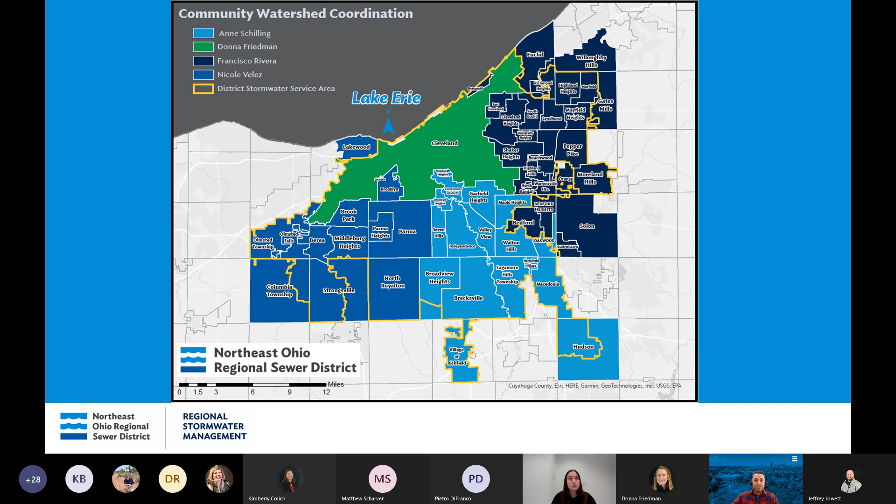So to talk about the community cost share program, as you know, 25% of the total annual stormwater management program fees collected from each member community are allocated to your community cost share account. You can use these on local stormwater projects. Currently there's over $21 million available to our member communities for your local projects.

A few things to keep in mind. You need an approved application and executed agreement before a project begins, so make sure to submit your application, get it approved, and get that agreement executed. Also consider an allocation agreement for larger projects to allow for reimbursement over the next 5 years, this way you don't have to have all the money in your account up front. And when your projects are complete, remember to submit for reimbursement. The funds are there for you, they're encumbered and ready for you to receive back through reimbursement, so please submit your reimbursements and continue to use your community cost share funds.

I also wanted to share with you this highlight, since the program started, how much money has been reimbursed in total annually. As you can see, over $39 million has been reimbursed for stormwater projects in the local communities. This program has been very effective, and we'd like to continue to see that happening in the region.

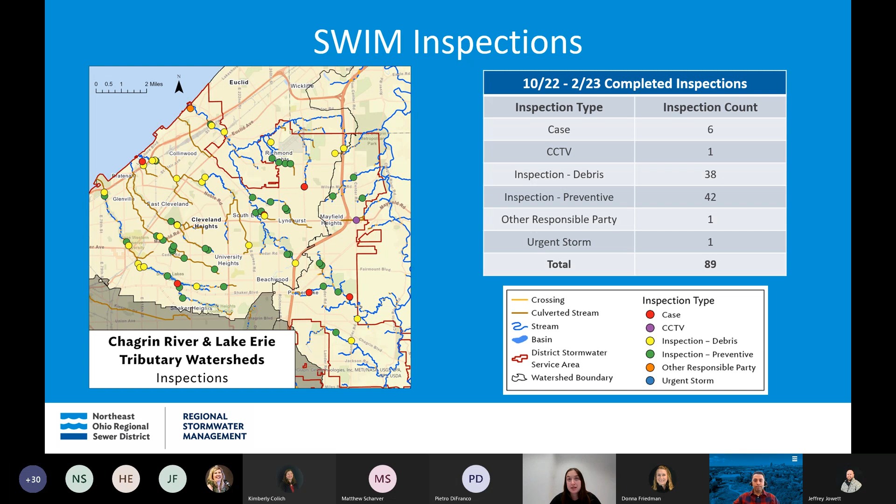So our maintenance department, since we last met, has completed 17 debris and sediment removal projects in the Chagrin and Lake Erie tributary watersheds. Those debris and sediment removal projects totaled approximately 399 cubic yards of debris and 150 cubic yards of sediment removed.

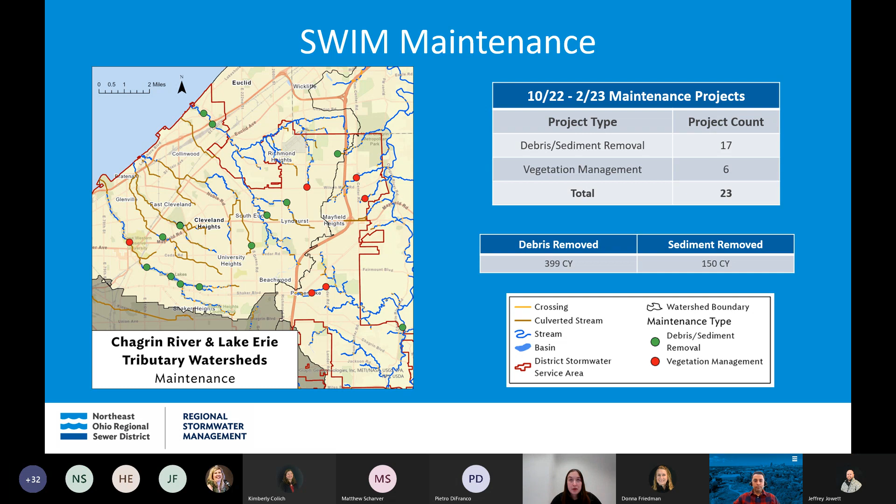We have also completed 6 vegetation management maintenance projects, which are performed by our internal maintenance crew, and they're primarily performed at regional project sites, and they include activities such as weed and invasive species management, tree pruning, planting live stakes, etc. Next slide, please.

This year, we are beginning the design of debris racks at the inlets of 2 culverted stream sections of 9 Mile Creek along Belvoir Road in Cleveland and Cleveland Heights.

At this particular location, the culvert is about 12 by 12 feet, there's a middle wall that splits the culvert into 2 pipes. So it's a hot spot for debris in the culvert to accumulate at this location, which is where this manhole is located.

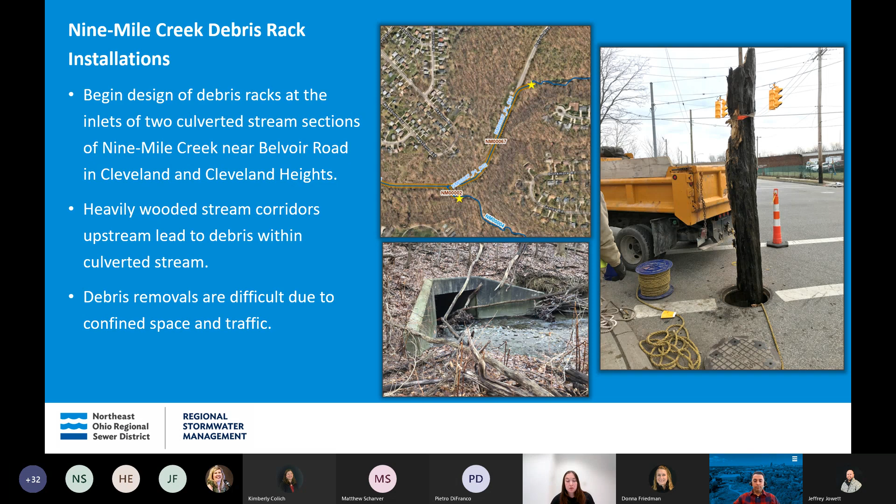We have previously removed approximately 130 cubic yards of large woody debris from this culvert. So installing these debris racks and access roads at the inlets will significantly improve our inspection and maintenance processes for access and debris removal. Next slide, please.

This year, we began construction in January 2023 of our Doan Brook Stream Bank Stabilization at the Shaker Heights Country Club. The asset was identified as a top contributor of sediment to Green Lake during a SWIM 2021 root cause failure analysis study. Performing this project, we determined would help prevent sediment transport to the Green Lake forebay, which would reduce our dredging maintenance efforts in the future.

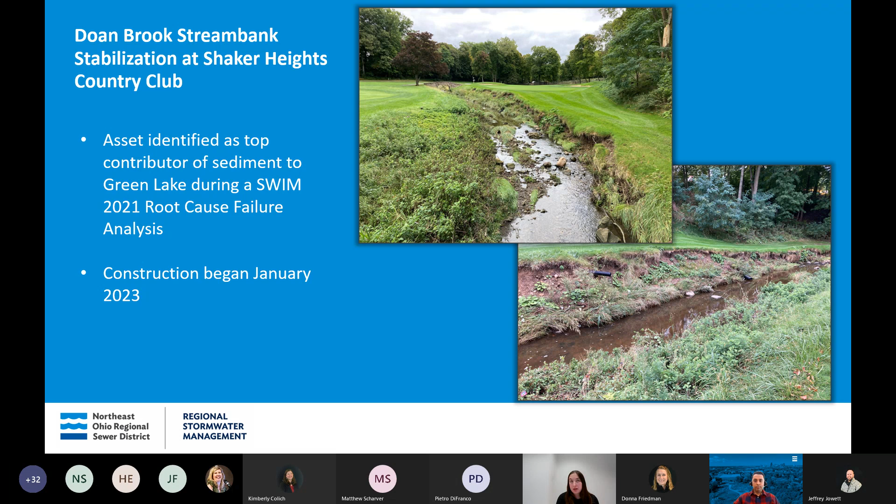Next slide, please. And so this photo was taken about a week ago. This is prior to the planting of a native riparian mix along the soil bank area that you can see above the rock protection. That will be completed by the substantial completion date of April 30th, 2023.

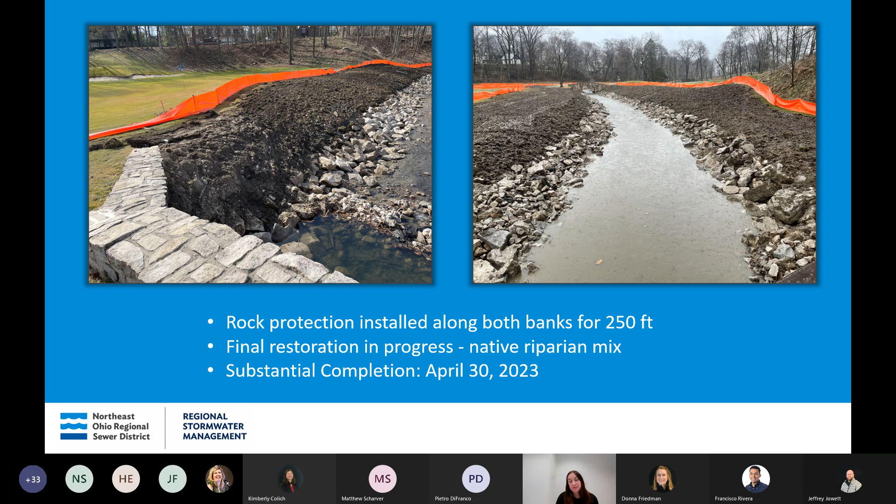And next we have Mike Blair, who is the project manager in our Watershed Technical Support Group. Thanks, Andriana, and good afternoon, everyone. If we have the next slide, please.

Just to give you a quick summary regarding the Chagrin River and Lake Erie Direct Tribs Stormwater Master Plan. The study itself was completed in May of last year. And since that time, we've distributed all the community reports to each of the communities located within the Chagrin River and Lake Erie Direct Tribs watersheds.

So you should have a chance to take a look at those and review them and let us know if you have any questions. Since that time, in the last fall, I'll be talking about this shortly, we have taken all the problem areas identified during this study and have put them through our nomination process. We've scored each of the problem areas and have prioritized them and started to incorporate them as part of our annual stormwater construction plan review.

What I'd again like to reiterate to everybody here is that please take a look at these community reports and the plan, the overall report themselves, and let us know. Reach out to your watershed team leader to let them know if you have any questions, if you'd like us to review the problem areas with you, to get any updates that you might have, and any questions you might have about implementing the alternatives that are identified in the master plan.

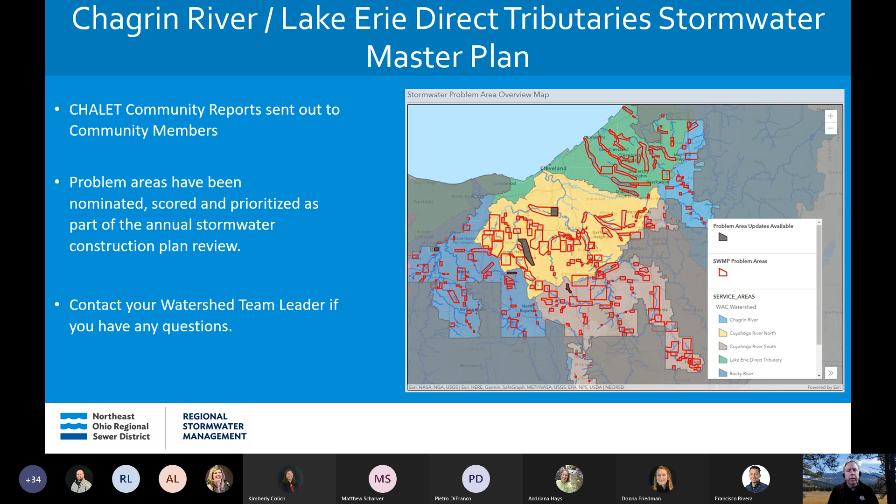As mentioned in the previous slide, we took both the problem areas identified in the latest stormwater master plan study along with all other nominated projects through the nomination process to arrive at our 2023 stormwater construction plan. We ran all nominations through August 2022, validated them from August through October, and reviewed previous nominations for updates. We then scored and prioritized them, completing that process in November. We're now finalizing the 2023 plan, which we hope to have approved by our board later this month.

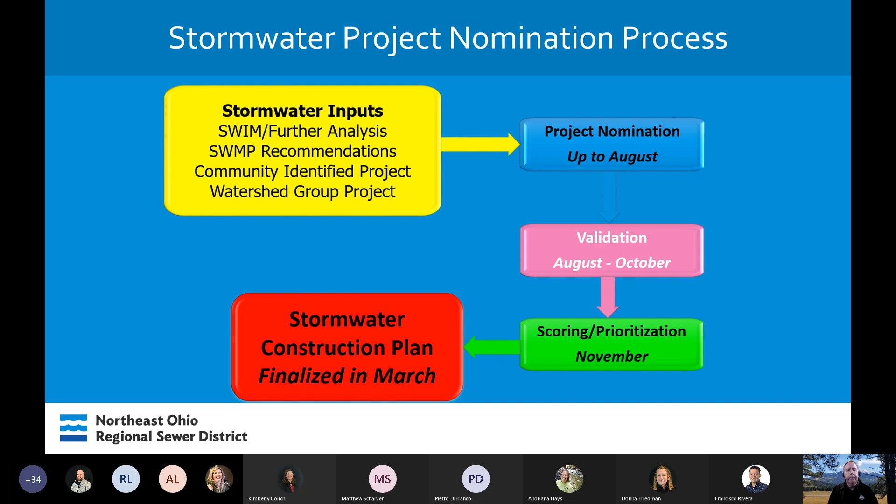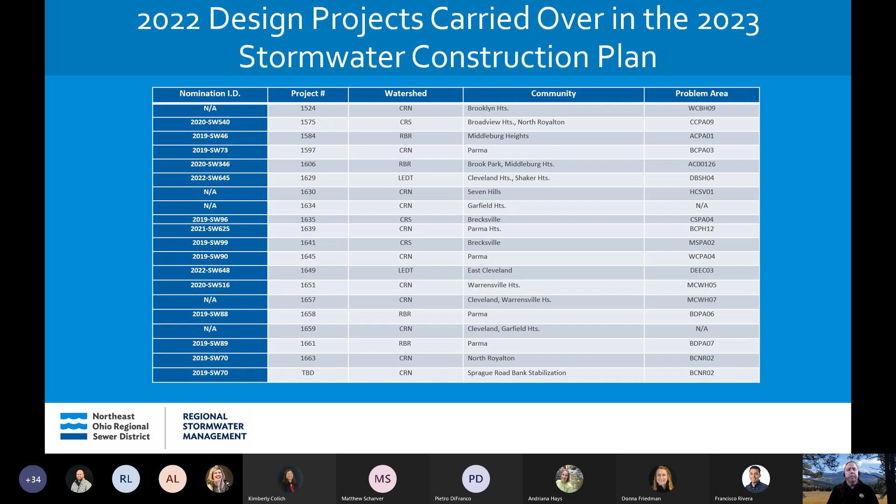In addition, we're adding 4 new projects that are immediately ready for our design phase. The first is the Phase A Kolleda Ditch. We have a lot of failing infrastructure there, so we're moving that ahead through pre-design.

The next project is located in the Rocky River watershed, West Branch Problem Area 5, in Olmsted Township. We've secured a critical mass of the property needed to move forward with phase 1, so we've put it on the list for this year.

The next one is the Applewood Basin improvements, also in the Rocky River watershed. We have a large amount of failing infrastructure associated with those basins, so we thought it prudent to move that into design to maintain conveyance through the area.

Finally, the Smith Road Basin project, in the Rocky River watershed on Abrams Creek. We've secured all the property associated with this alternative and received federal funding for design and construction. Based on the timing of that funding, we needed to move it forward for the 2023 construction plan. This isn't the only list of new projects coming on board - as we gain further capacity, both financially and with design and labor, we'll be moving additional projects through this year.

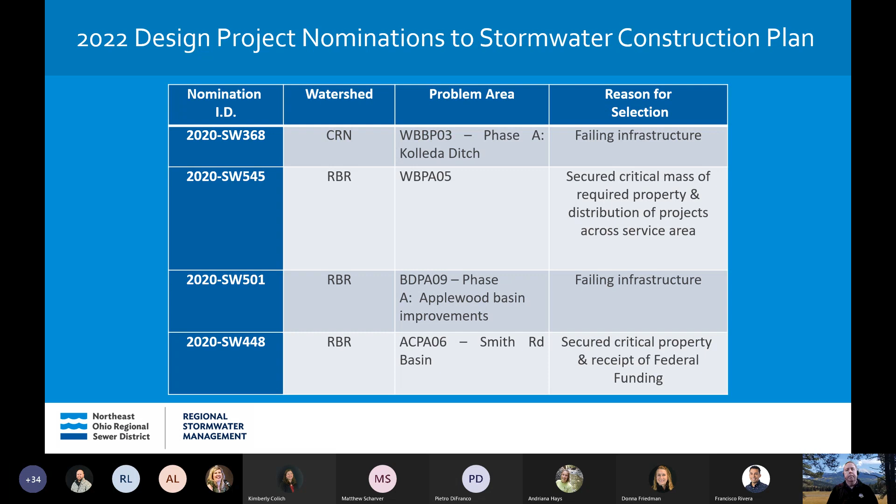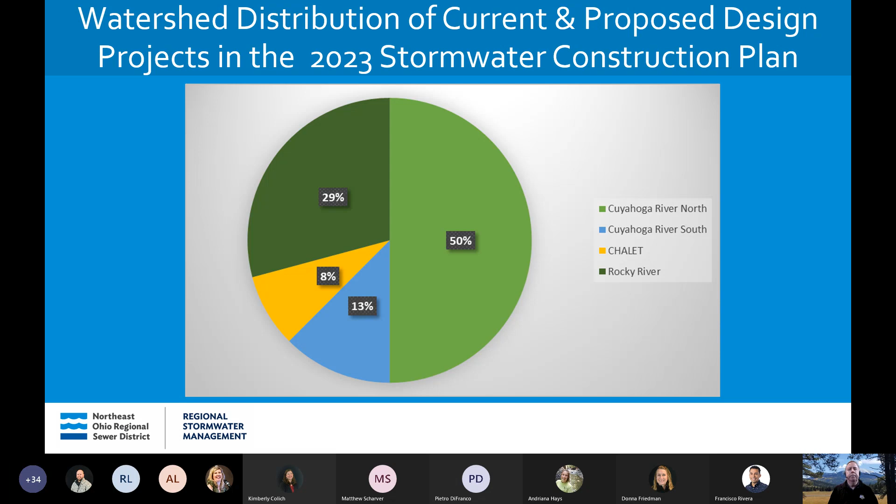Now, as I mentioned, we have about a dozen projects that make up our top 25 stormwater nominations that we're actually recommending to go through our advanced stormwater planning process. And the reason why we want to move these projects into this phase is that these are projects that, when...

...we were doing the planning study, really require additional information to fully understand the RSS impacts going on with these problem areas. So this may require additional coordination with community members affected by this problem area, doing some further detailed analysis of our swim models that cover the problem areas, and actually maybe even gathering some further field verification information.

The second way that this might go into advanced planning is based on the cost that was put together during the master plan study, where we basically get projects that are essentially $10 million or more, that's a significant impact on our annual budget, and it puts a big strain on that.

So that's where we want to take a look at these again, see if we can break these down into phases, which are more easily able to go through our workflow on an annual basis. Another reason we would want to do phases is if we're looking at a particularly complex alternative, where these could be potentially problem areas that might be a mile long, involving culverts, open stream segments, and crossings. What we're trying to do is break that up into more manageable projects that we can put out for bid and implement for construction.

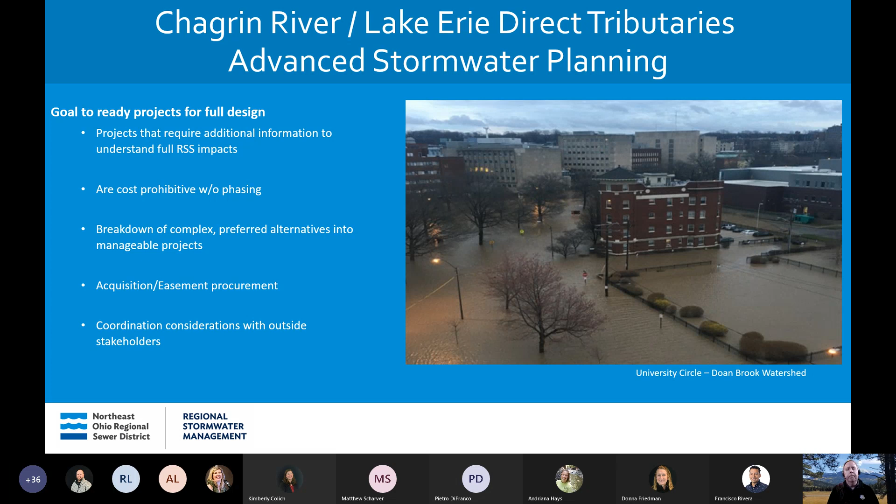And then we're going to be looking at a neighborhood, the Milligan, Erwin, and Carrington Avenue neighborhood, just east of West 130th Street. Again, this has been ongoing, looking at the alternatives, tweaking them where we need to in order to get that advanced planning done in the third quarter of 2023.

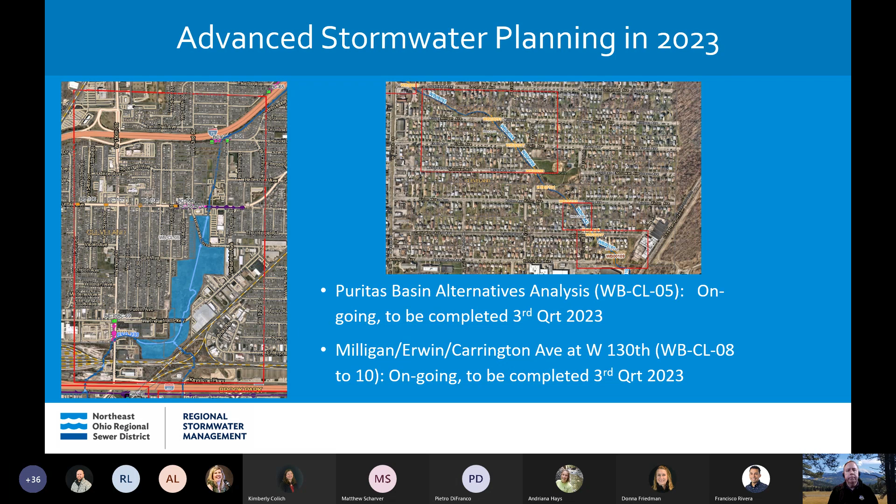And following the completion of those two, we're going to be starting up a third advanced planning task. Again, this involves the Big Creek West Branch, basically 3 problem areas that were identified in that area. In this case, the preferred alternatives that were developed for those 3 problem areas are no longer viable.

So what we want to do is get a better understanding of the interactions between the regional stormwater system and the adjacent local stormwater system through our modeling, and get a better understanding of what the benefits are to the RSS and the LSS by implementing the new alternatives that are identified during this planning process.

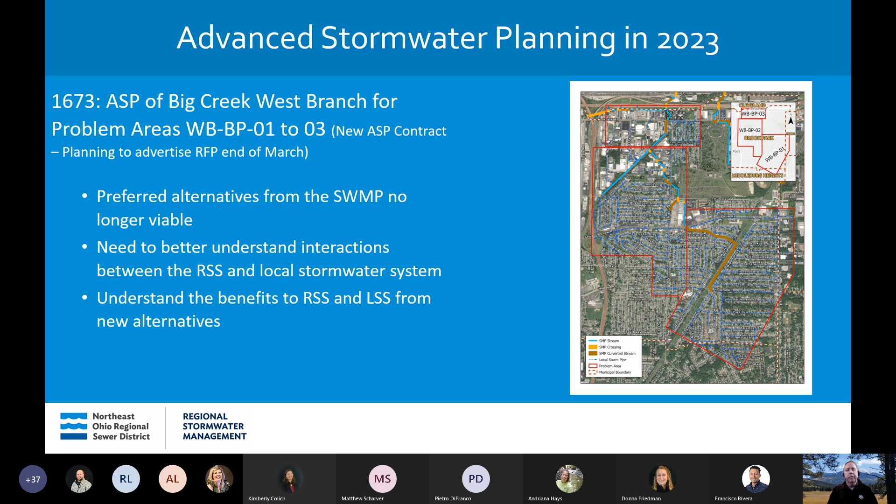We have 3 projects that are getting ready to start or are currently in the construction phase, and we've just recently completed, in December of 2022, the Foster's Brook stream restoration over in Mayfield Village. Our community lead on that one was the Cleveland Metro Parks.

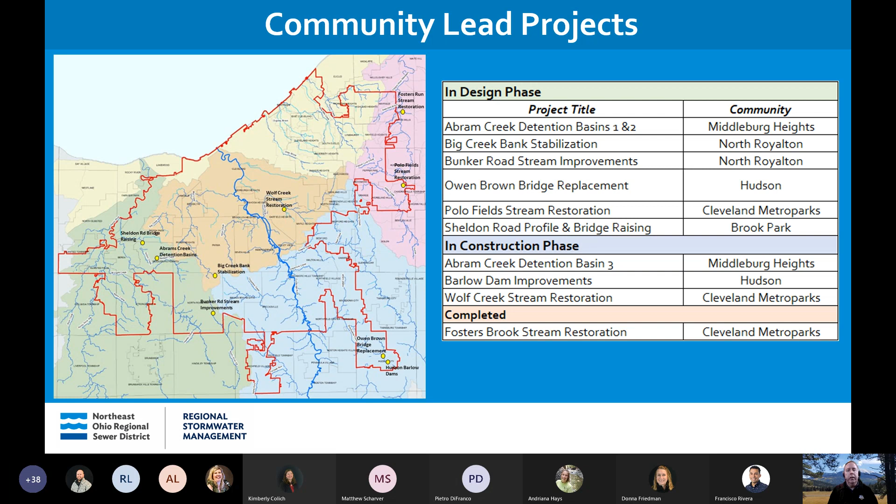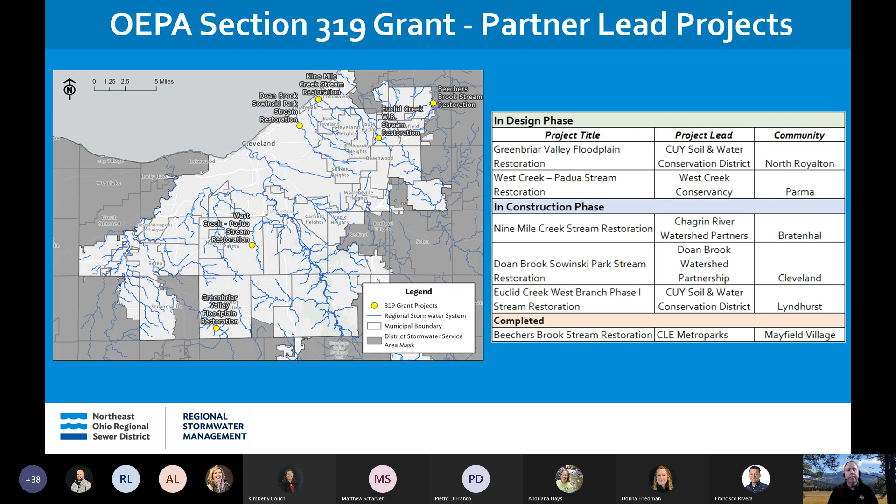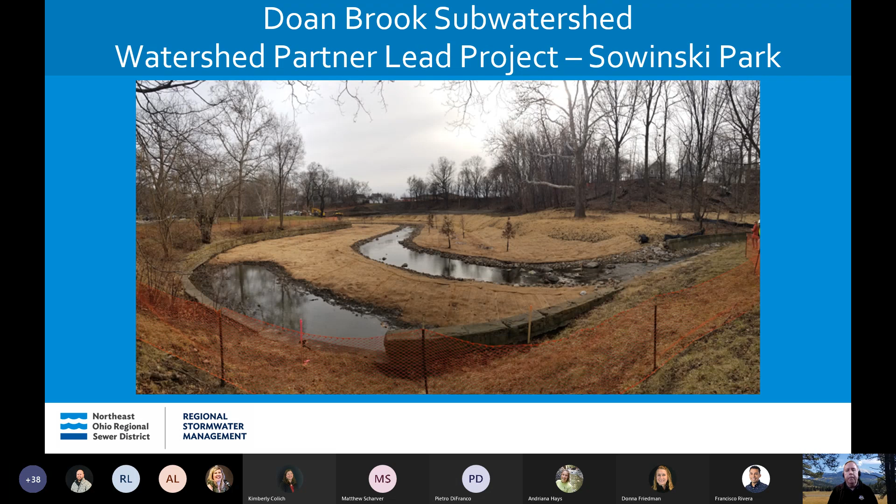As of today, this is what the project site looks like. They've reached substantial completion at the end of February this year. You can see a more sinuous main channel of Doan Brook with an expanded floodplain and stabilized banks. We were able to cut down some of those concrete blocks in certain areas to open up that channel and floodplain. In the lower left-hand corner, you can see where we repurposed the old stream channel to make a small wetland area, which will be further enhanced with additional plantings occurring later this spring.

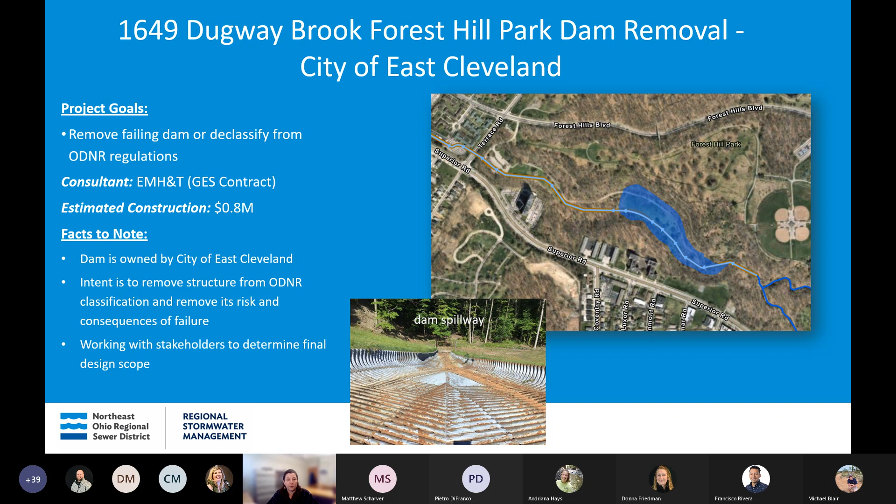The next project is the Doan Brook restoration near Horseshoe Lake Park. We have a few slides on this, and I'll go through a summary of where we're currently at and where we're headed. This project is to remove the Horseshoe Lake Dam, which is failing, and restore the two stream corridors that were impounded by this dam, one on the north side and one on the south side, that formed the horseshoe shape of the previous lake.

We're going to be integrating stream restoration with some landscape architecture. Our consultant is a joint venture between AECOM and Stimson. We are currently under pre-design. We've done extensive public outreach and public forums, both communicating where we're at and gaining information back from the public on things they want to see in this park after we're done. It looks like June we'll be wrapping up our pre-design, and after that we'll move into detailed design, hopefully with our AECOM Stimson team.

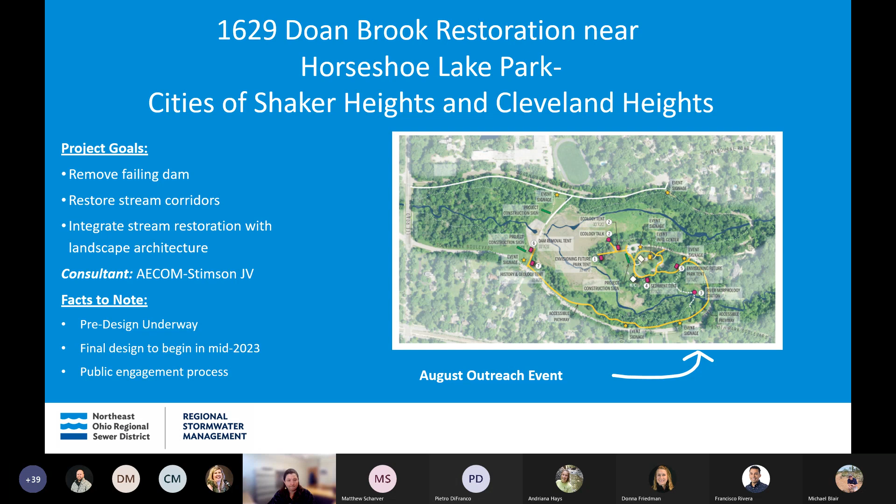After that event, our designers went and started working on different alignments for the streams. There's two streams that come together, so one question was where should these streams now confluence? Is it at the existing dam location, or further downstream? Where does the stream want to be, and where can we put it so the park has space for landscaping or public amenities that communities might want?

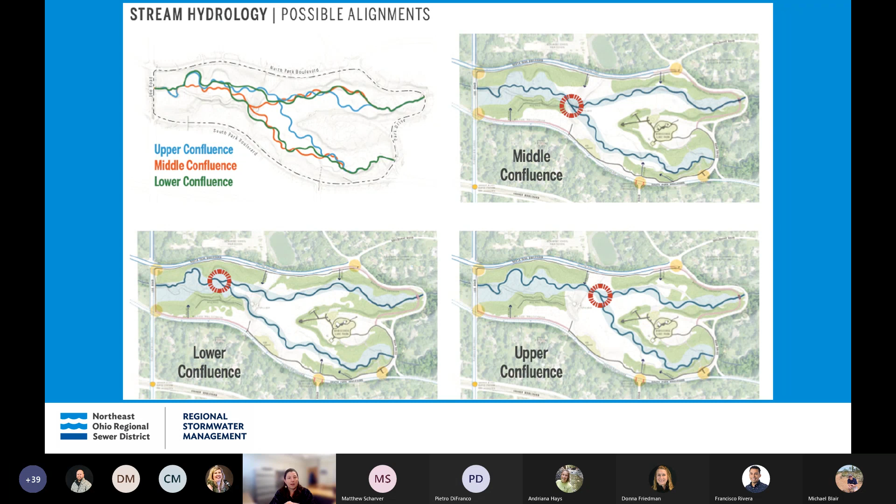So what we did was take three different possible alignments and came back together with the public in December. We had three different alignments, and we had park amenities cut out that people could place on the maps to give us an idea of what type of park they would like and what landscape architectural features they were interested in seeing.

Some of the items they could place included paths to cross the stream, bird lookout locations, more traditional park features, a sledding hill, or something as large as an amphitheater, each with different costs. We challenged participants to look at all the potential amenities within a certain budget, knowing we can't put everything out there and have to prioritize.

The real question we need to get through is what do we do with that sediment? Can we use it to create landscaping mounds within the park area? Are there locations to put the sediment that might give it some landscape creativity or innovation within the park space?

Okay, one project to highlight during the construction section, next slide. We're actively constructing this Pepperloose Creek project in Pepper Pike on Gates Mills Boulevard.

This is a project where we purchased one home in order to reroute a failing culvert, and we also had the opportunity to provide more storage within the boulevard of Gates Mills Boulevard to hold back more water, because this was a location where during large rain events, the water was overtopping the road in excess of our measured 9 inches.

We always use this 9-inch rule where we consider that impassable. So this project not only provided storage and replaced an existing culvert that was failing, but we also tied into the downstream open channel segment.

So that's currently under construction. It started last year. I believe our completion should be this summer, maybe third quarter this year. So we'll have that completed.

One thing to note on this project was that the city of Pepper Pike utilized some community cost share for rehabbing one of the upstream culverts within the project area that was within the right of way. So this one's rolling and hopefully to be complete soon.

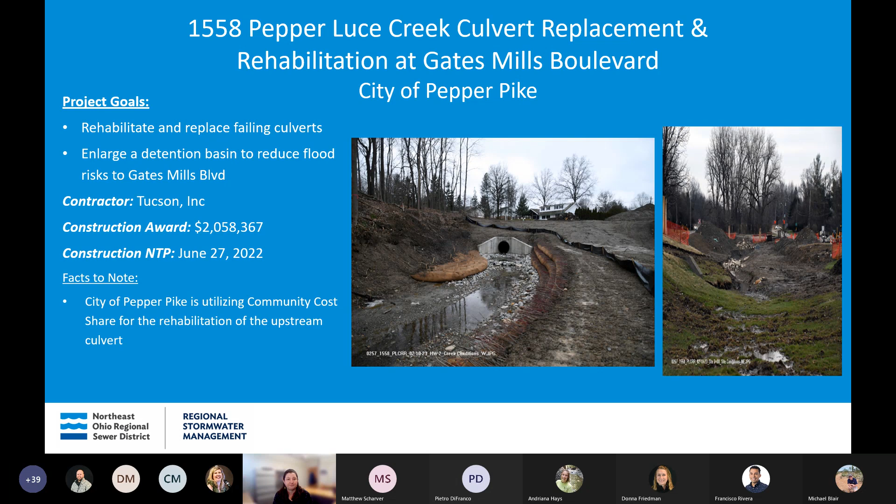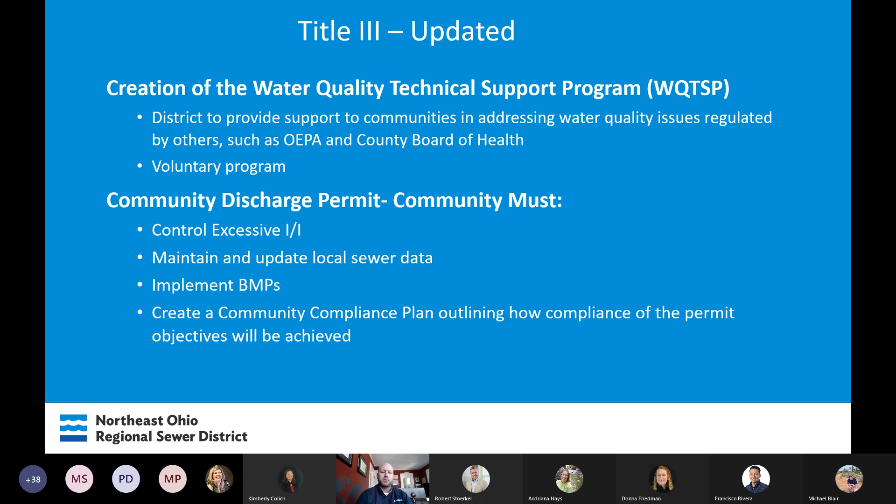We also updated Title IV. It's very similar to the update we did to Title III, where we went through and looked at that document structure, aligned it with Title III so that usability will be better for us and our member communities. We went through the definitions again, removed those we didn't need, updated some, added some terms if needed.

The big one here in Title IV is we created a new chapter on connections to or disconnections from the combined sewer system. The information within this chapter is not new, but we put it in its own chapter because we recognize the importance of this information when talking about connecting or disconnecting from the combined sewer system. The Sewer District is putting in a major investment through Project Clean Lake to address combined sewer overflows, and we want to make sure we are protecting that investment, and we want to know about those connections and disconnections to the combined sewer system.

So this goes right along with what Rob was talking about with that Title IV plan review. All right, next slide.

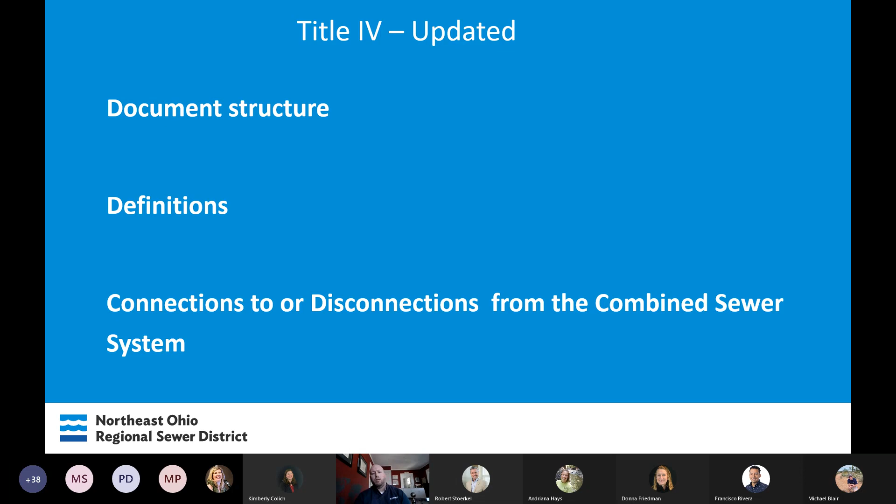So the benefits of these updates to Title III and Title IV, the big thing is just consistency. We wanted these documents, these codes of regulations, to be more consistent, to make sure they aligned better across the district, and really make it easier for our member communities to understand what is being asked of them and what is required.

One of the ways we're going to do that is we're going to have one unified permit. In the past, if you were a community with combined sewers and separate sewers, you'd have two permits through us, one for Title III, the separate sewers, and another for Title IV, the combined sewers. That got a little tricky dealing with two permits. So we are going to make one unified permit that addresses both combined and separate sewers.

We hope to improve the utilization of district resources for our member communities, kind of streamline things. We made a major investment with the local sewer system evaluation studies across our service area. We want to ensure those plans aren't just put on the bookshelf collecting dust, but are being utilized to address water quality issues. And to help fund the projects identified through the LSSESs, the MCIP program is out there to fund projects and ensure this work gets accomplished. So it's really going to come full circle, and everything will align with the LSSESs, the new unified permit, and the MCIP program.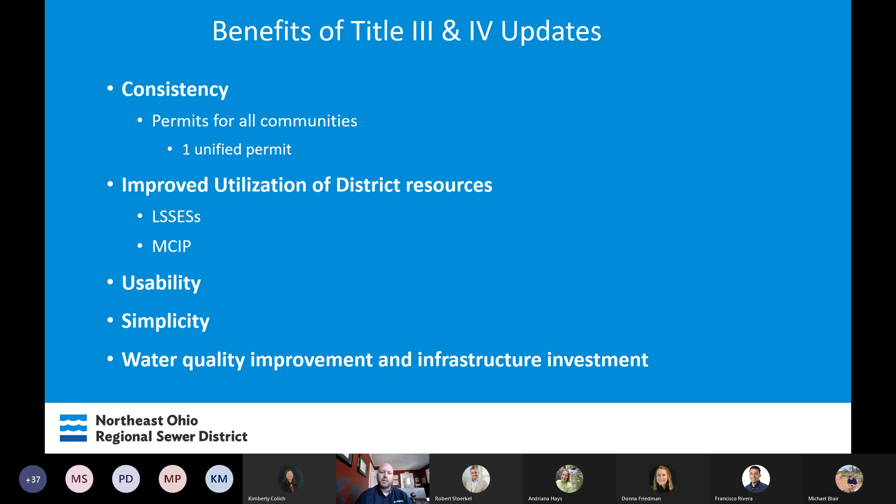Again, my name is Jeff Jowett. I'm the Community Discharge Permit Program Manager. We're here to help support our member communities, and we are rolling out the Title III and Title IV changes throughout this year. We'll be looking for other opportunities to meet with you, and in the latter half of the year, the unified permits will be sent out to our member communities.

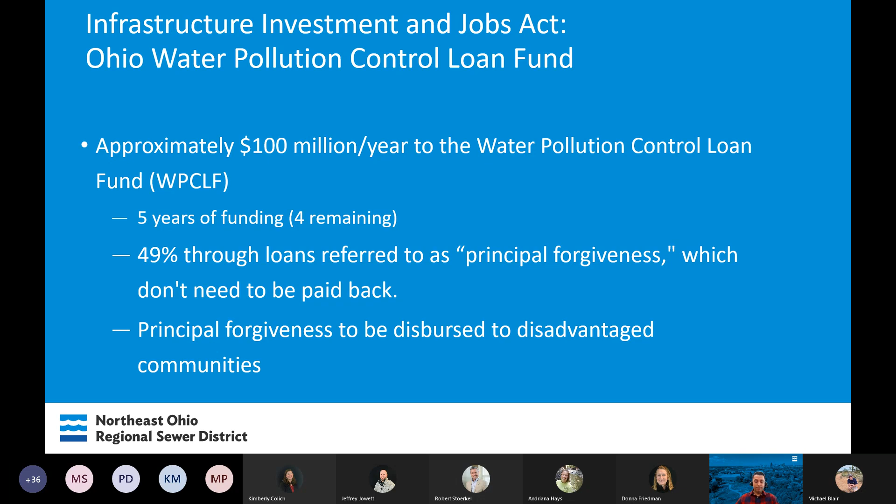This is the criteria for disadvantaged communities. Communities had to meet 3 of 4 categories to be considered for principal forgiveness. Last year, 20 of our member communities qualified as disadvantaged. The numbers have changed just a little bit from last year, so we'll be looking at the new numbers to see if those communities have changed in their criteria.

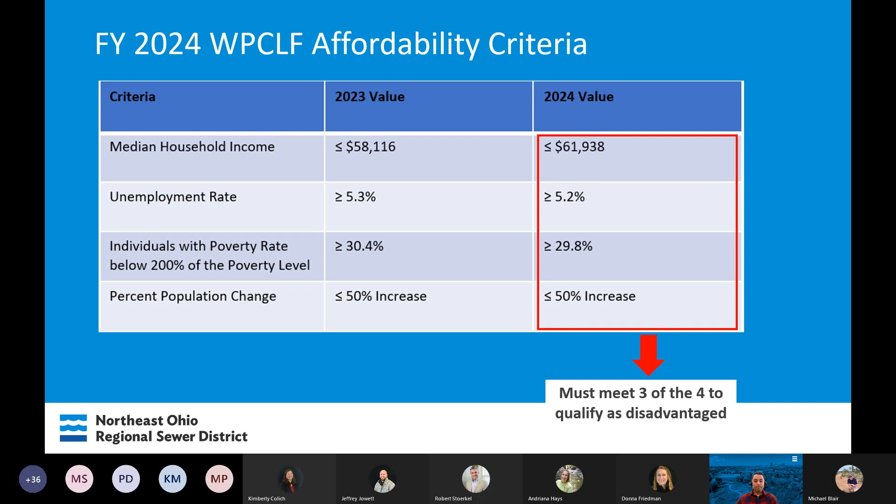These are some of the projects that score well for the Water Pollution Control Loan Fund. As you can see, it's similar to the Member Community Infrastructure Program in that projects that benefit human health are a priority.

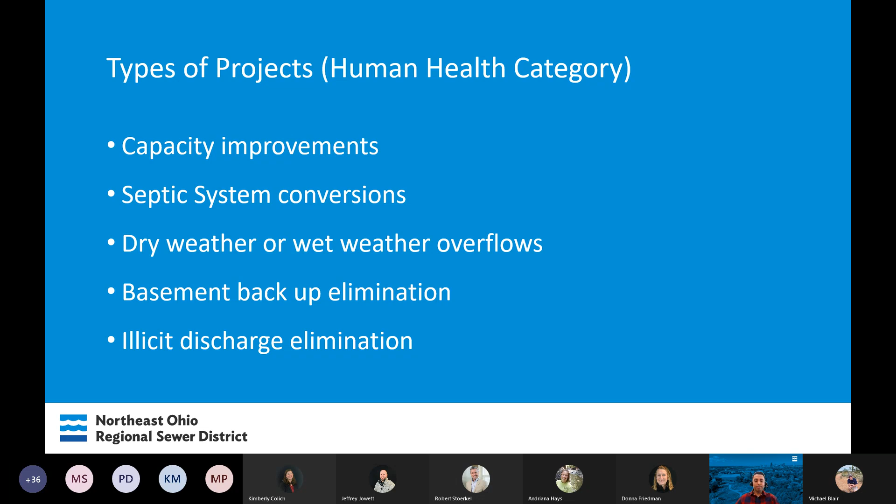In 2022, we reviewed the communities that qualified for funding against the local sewer system evaluation studies, the LSSESs, and analyzed what projects we thought we could design, as well as the tier of the project, to help prioritize these. We helped communities apply for 8 projects, and 3 ended up receiving principal forgiveness. This year, we've again been looking at how we can position communities to apply for this program in August. If your community is eligible for principal forgiveness, you'll likely hear from us in the future, and we'd love to work together to bring more funding into the region.

So the second thing I'm going to talk about is our Member Community Infrastructure Program grant. With MCIP, it's a competitive grant offered annually by the sewer district. For funding year 2024, there is $15 million available to be awarded.

The grant program is created to address Clean Water Act issues, and since 2017, $62.5 million have been awarded, with an additional $82.5 million in matching investment by the communities and other funding sources. So we've been quite busy.

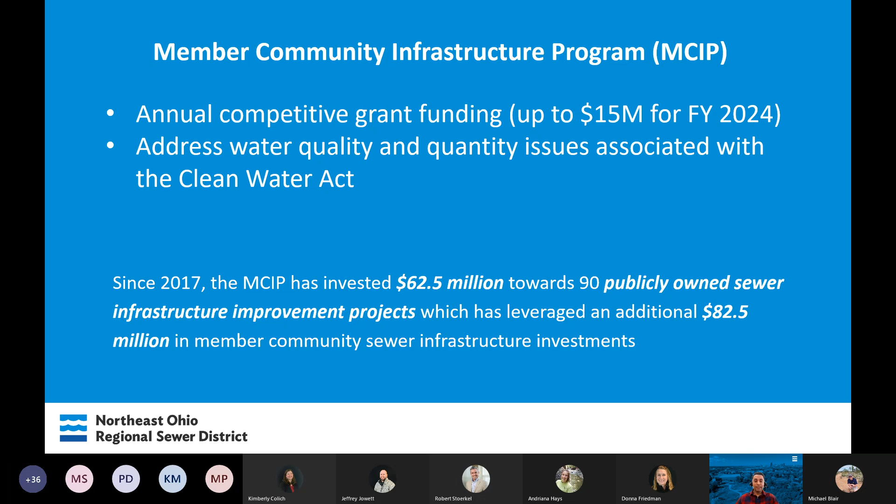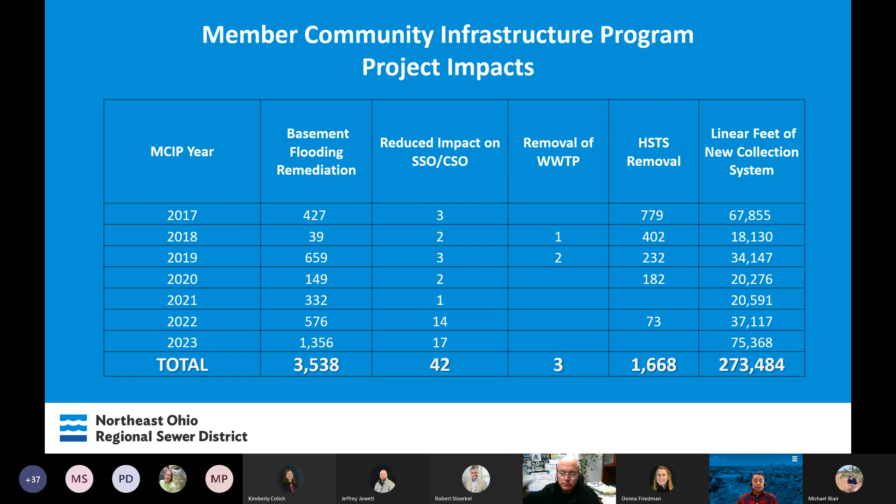So if you take a look at this slide, you can look over the last few years. You can see a lot of great work has been done over the last 7 years affecting various issues in the community, local issues in the community. And we look forward to your 2024 funding year submissions.

So a few things I'd like to focus on. There have been some changes in the MCIP policy. The most important change is how we will be distributing the funds. Previously, reimbursement has been the funding mechanism for MCIP. Communities would pay the consultant or contractor, and then we would reimburse those costs. But beginning July 1st, 2023, we'll be using direct disbursement.

Direct disbursement means that the city will receive and review the invoices from the contractor, and then they'll make sure that the costs are correct when the work is being done. Then they'll send the invoices to us. We'll review the invoices and then pay the community directly so that the community can pay the consultant. So direct disbursement begins July 1st.

The current reimbursement procedures will remain in effect until June 30th. You can expect an email from Linda Mayer in June with more details about this. And if you have an MCIP project agreement that was executed before this change was enacted, you can request that direct disbursement be the method used after July 1st.

Looking ahead at 2025, as you heard in Jeff's portion of the presentation, the communities will have the opportunity to participate in the Water Quality Technical Support Program. Participation in this program is required for a community to be eligible for next year's MCIP round. This anticipated change will likely be reflected in the 2025 MCIP request for proposals. So as we move forward through these code updates, Jeff will be reaching out to communities about this program and about how it'll affect MCIP.